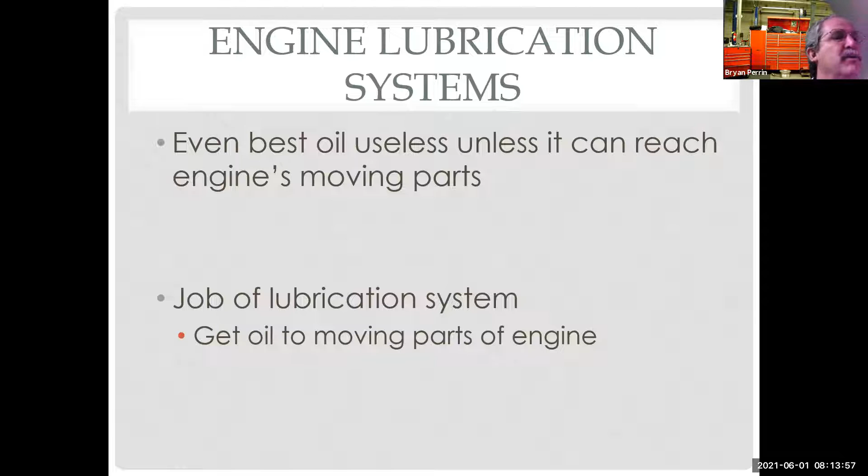Even the best oil is useless if it cannot reach the engine's moving parts. The job of the lubrication system is to get oil moving to the moving parts of the engine. On automotive engines today, we use a combination system of pressure lubrication and splash lubrication.

Pressure lubrication is where I have an oil pump. I'm going to pick the oil up and force it into certain places. We do that for our friction bearings, which is the primary place we force oil pressure into. That's what allows us to use an oil filter. I couldn't have an oil filter unless I had a pressure lubrication system.

Then we also have components of the system that are splash lubricated. The timing chain, a lot of my valve train, rocker arms, things like that, have oil just splashed on them, and that's enough lubrication for those things. So I don't have to pressure feed everything.

There are systems out there, like on air compressors and lawnmowers, that are splash lubricated and don't have a pressure lubrication system. They rely on the crankshaft actually going through the oil and throwing it up. A lot of times there's a little scooper that throws oil throughout the engine. And that's why lawnmowers don't last very long.

Lawnmower engines just don't hold up very long. And you're thinking to yourself, wait a minute, I've had a lawnmower for 10 or 15 years. Well, let's think about how many hours of runtime that is.

Because we know we don't mow the lawn every week. We don't need to mow it year round. And how long does it take you to mow the lawn? Is it a half hour? Maybe you have a big lawn, an hour, that would be huge. So odds are that mower fires up and runs for 20 to 30 minutes, maybe 30 times a year.

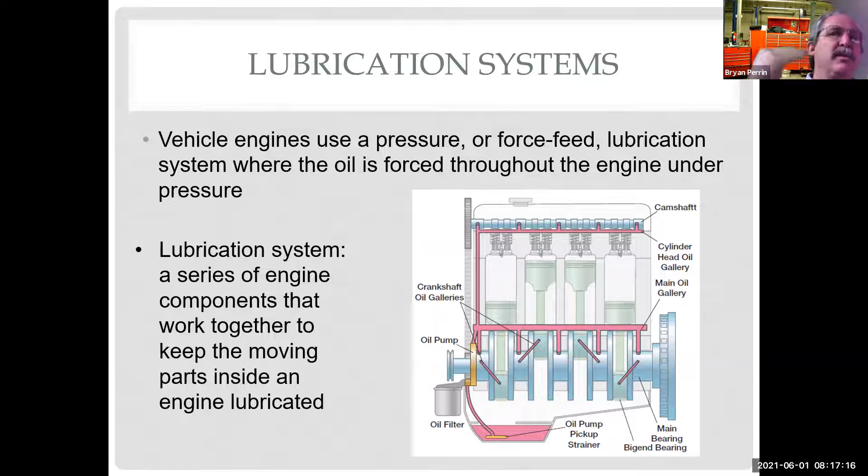On a friction bearing, oil is used between what two components in order to reduce friction? Number 3, between the bearing and the spinning shaft.

Because remember, the housing doesn't move. I don't need to lubricate between the housing and the bearing; the housing's holding the bearing. So the part that's rotating is the shaft, and that's where we need to put the oil, between the rotating shaft, whether it's a crankshaft or a camshaft, and the bearing.

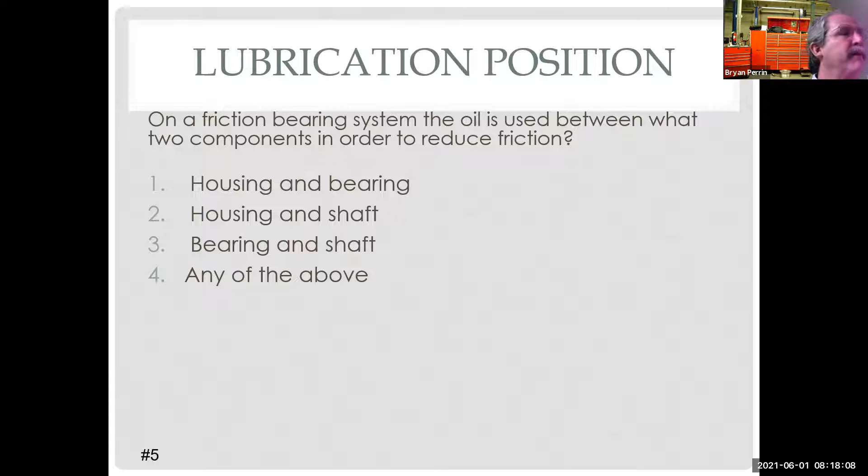We have two different types of oiling systems we use on automobiles: a wet sump system or a dry sump system. A wet sump system has oil in the oil pan, and we have a strainer in the oil pan where we use difference in pressure. We create a slight vacuum, pull oil up into the pump, and then circulate it through the filter and into the rest of the engine.

So most of the cars on the road, 99.5% of the cars on the road, or 99.8% of the cars on the road, use this system.

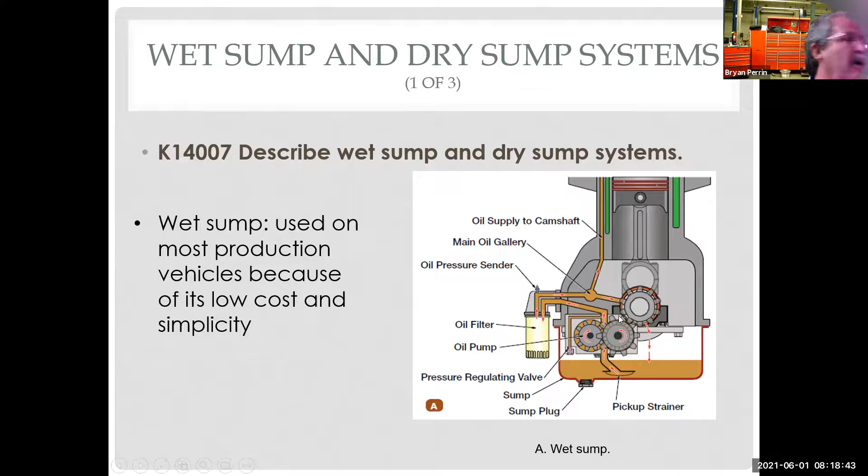There are a few cars that use what's called a dry sump system. A Porsche 911 was one of those. The advantage of this is that the crankshaft cannot hit the oil in the pan.

I can make the pan shorter, so this is great for clearance, as well as now I'm using a low pressure pump to pull stuff out, over to an oil hold tank, and then a high pressure pump to put oil back in the engine. This is a real advantage for racing, because if I'm cornering real hard, going uphill or downhill real hard, I have constant oil supplied to the engine.

To put in perspective, a Porsche 911 six-cylinder engine would hold 9 to 11 quarts of oil. That's a lot of oil for a small six-cylinder engine. One reason is because it had that oil tank. Another reason is it was air cooled, so it used the oil entirely for cooling on these older ones. But this is a dry sump system, so you'll hear wet sump and dry sump.

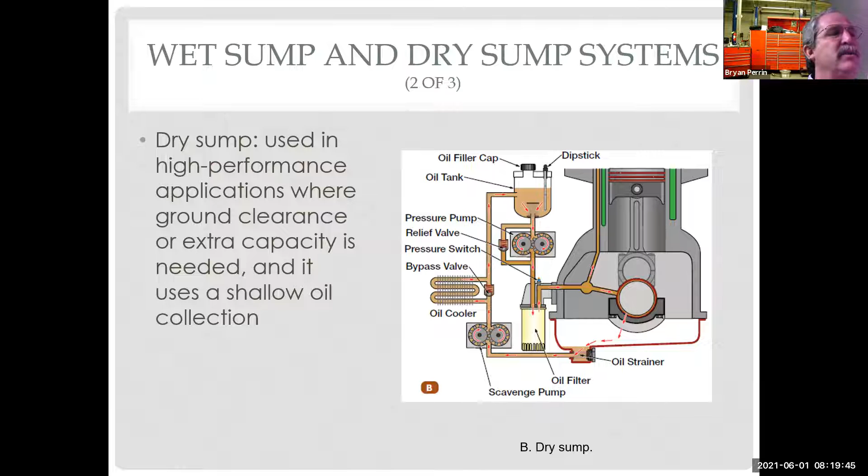The oil pans can be broken into a couple parts. So this right here, what we're actually looking at is a sub pan, because you see how shallow it is. I'm not holding 4 quarts of oil in that. So this will have an aluminum main oil pan and then a tin or aluminum sub oil pan, very common on cars today. And here's our drain plug, we always want to replace the seal on the drain plug anytime we pull it out.

This is a windage tray. Windage trays are used to keep oil away from the crankshaft as it's spinning. We saw those a lot on older vehicles, especially trucks going back to the 70s.

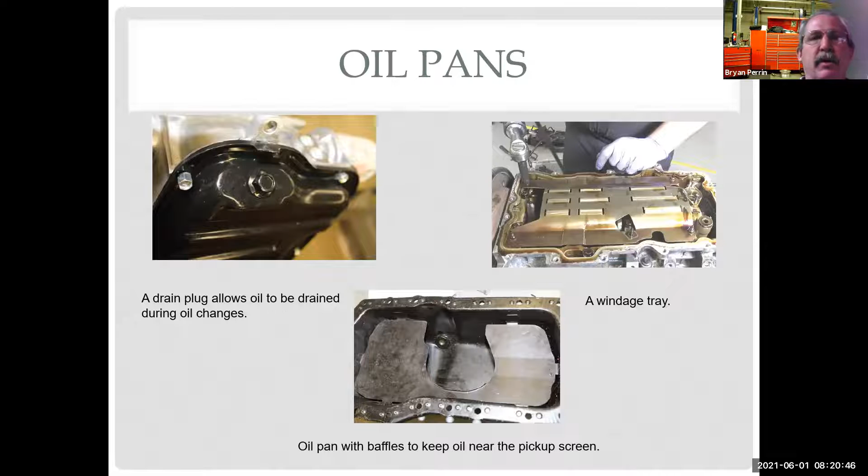A lot of cars today have baffles in the oil pan. One of the purposes of the baffles, which we'll see vertical as well as horizontal, is to control the movement of the oil in the pan as we accelerate, decelerate, go side to side, and corner, making sure we keep the oil down away from the crankshaft, but also so the pickup can pick it up.

And here's what I was talking about by splash lubrication. This is from something like a compressor. Here we can see I have a camshaft and a crankshaft, using gears to connect the two. I have a little slinger that's going to come through and grab oil and just toss oil around inside here. So we're just splashing oil in here.

You can see where using this system really limits how much power I can put into this combustion chamber and push down on the piston, because the more power I make here, the more force is applied on this surface here, the greater the effects of friction.

So I can use this on low power applications like an air compressor or like a lawnmower. And certainly old cars, if I go in the Wayback Machine, go back 100 years, you'll find that engines were splash lubricated. But engines didn't last very long either before they had to be taken apart and rebuilt.

That's why we use a pressure oiling system on all the parts that require oil to be forced into them, and then rely on splash lubrication for the areas that we can just allow oil to drain over to keep it lubricated.

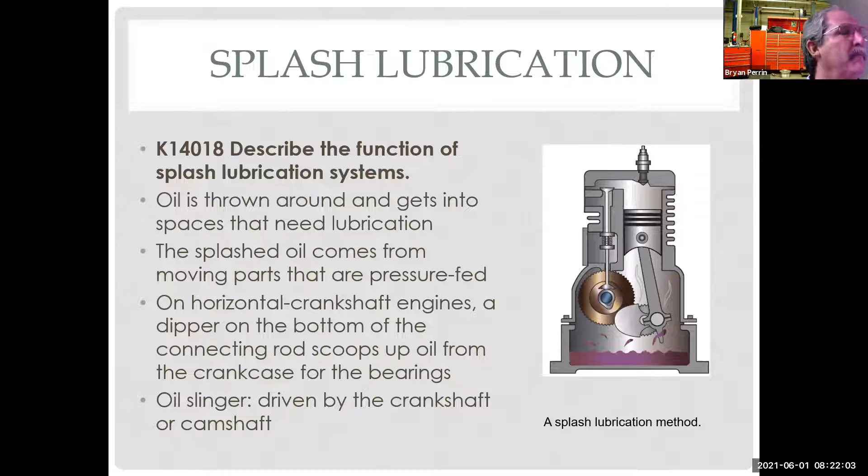So what type of oiling system is used on modern automobiles? A combination of pressure and splash lubrication. Absolutely.

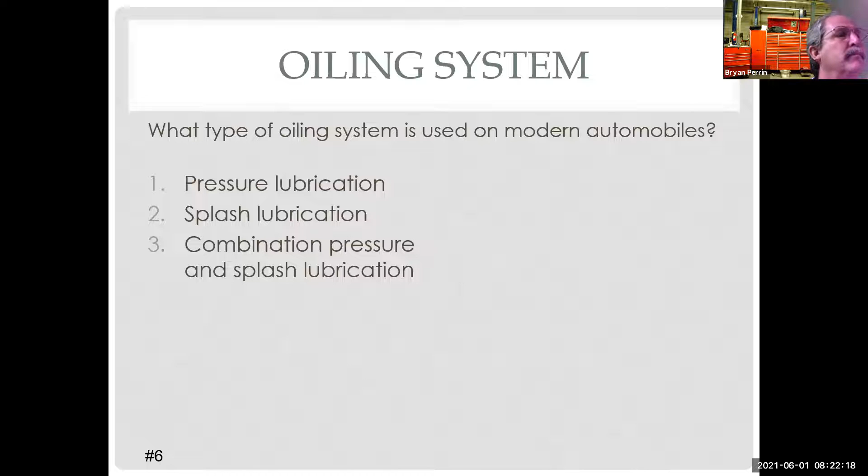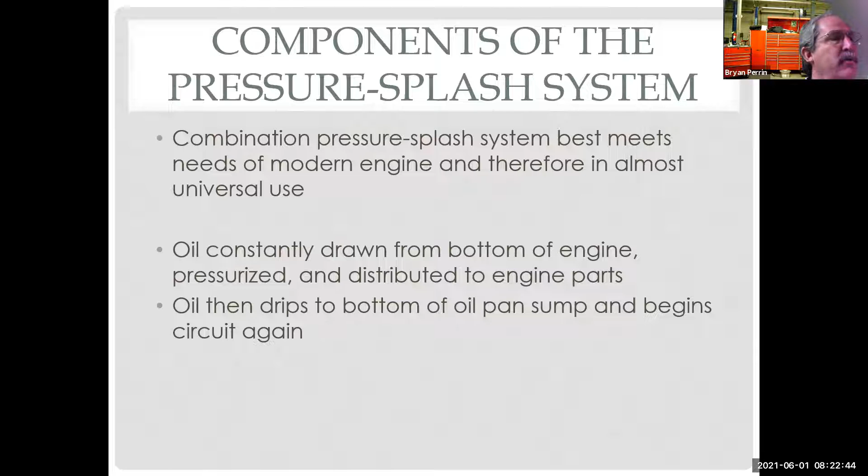The components of the pressure splash system, the combination pressure splash system, best meet the needs of modern engines, and therefore are in almost universal use. I can't think of anyone who doesn't do it. Oil is constantly drawn from the bottom of the engine, pressurized and distributed to engine parts. The oil then drips to the bottom of the oil pan sump and begins the circuit all over again.

So the first thing we have is what's called a pickup tube. The pickup tube will have a coarse screen on it, and this coarse screen will pick up large contaminants.

So it's really, although it's made out of a heavier metal, the screen's about the same size as the screen you see on your window. So anything that can get through your window screen is going to be pulled up into the oil pump. This is really designed to keep big particles out that would damage the pump, because we don't want to damage the pump internally.

The downside is that if I have foreign material in the oil pan, such as silicone from someone cleaning the valve cover gasket and scraping it, it can end up in the engine at the bottom. Or if we have a lot of buildup from burnt oil or bad oil, we get carbon chunks in the oil. Both of those can plug the pickup screen, and if this screen plugs up, we'll starve the engine for oil and very quickly damage it. That's why we really don't want things ending up in the oil pan. Even though debris can't get sucked into the oil pump if it's big, it can still block this screen.

When the screen gets blocked off, it's kind of like drinking a milkshake through a straw and you hit a piece of ice cream. You're no longer getting any milkshake, because the ice cream is blocking the bottom of the straw. Same thing happens here. So as we're pulling oil in, if this gets blocked, we lose that oil flow.

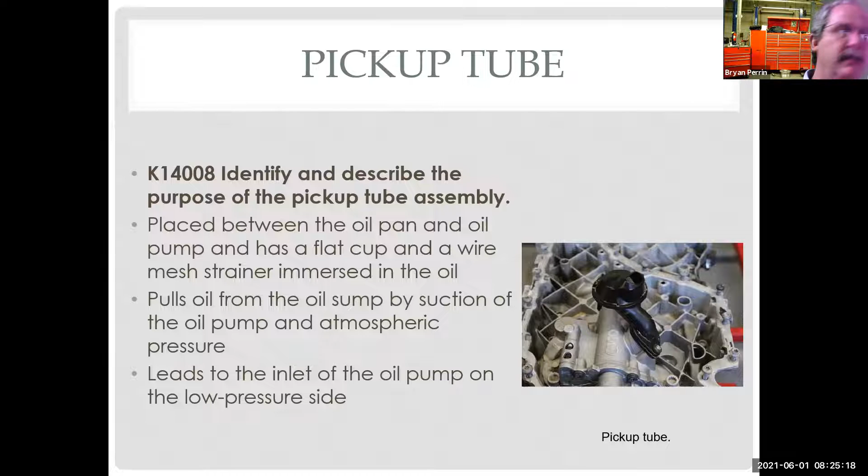We use a couple of different kinds of oil pumps on the engine that the book goes into. They all do the same thing: they pull oil from the oil pan and put it into the bearing journals and galleries of the engine, forcing oil under pressure through the lubrication system to deliver it to the parts that require lubrication. They're normally driven by the camshaft or crankshaft. Depending on the pump design and the vintage of the vehicle, they can be driven by the camshaft, the crankshaft, and some today have their own little timing chain, mounted as an oil pump cassette underneath the crankshaft, but it's still driven by the crankshaft, just connected by chain, not directly.

In a rotor type oil pump, the inner rotor drives the outer one, and oil is forced out of the pump outlet. Higher atmospheric pressure outside forces oil into the pump, filling the spaces between the rotor lobes.

One of the things the book does that I think is really confusing is they keep mentioning, and they do this with the fuel system too, that it's higher atmospheric pressure that allows the oil to be moved. Well, it's really the lack of atmospheric pressure, vacuum, that's causing it to move. They're both saying the same thing, but if I'm drinking a milkshake with a straw, I wouldn't say it's the atmospheric pressure pushing the milkshake up the straw rather than the vacuum I create by sucking. I mean, both are true, because atmospheric pressure pushes it up because I've created lower pressure in the straw.

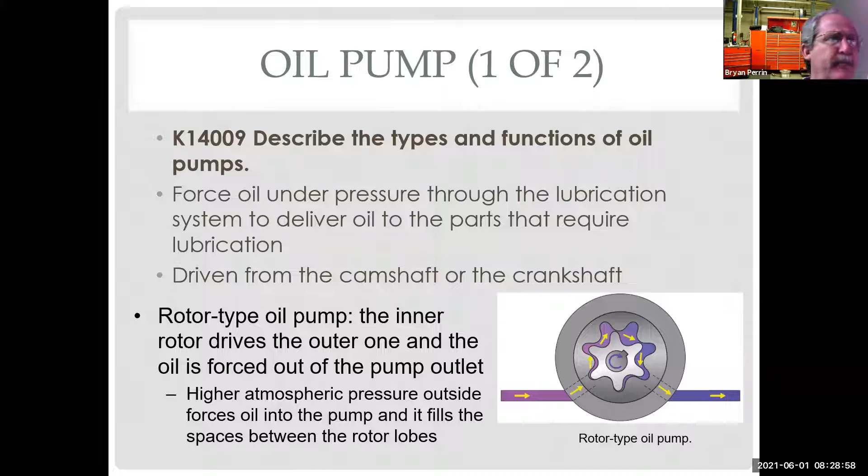I mean, it's all about pressure differential, but the book just describes it this way, and I think it's really confusing. It doesn't lend well to understanding or diagnostics, I don't think.

So a couple other types of pumps. I can have a geared oil pump. This first pump here is a very common pump today, the rotor type. This geared pump, we still use today, and these were used a lot back in older engines. And then the crescent pump, which we see on a lot of import vehicles. Toyota comes to mind, but a lot of import vehicles use a crescent pump.

The crescent pumps are mounted on the crankshaft. The center gear of the crescent pump is actually mounted onto the crankshaft, whereas these other two can be driven by a chain or a shaft, but they're not going to be mounted directly on the crankshaft. The crescent pumps are always mounted right on the front of the crankshaft. This is important because if I have an oil pump problem and need to work on it, where is it? Do I need to take the oil pan off because it's underneath, or take the front of the engine apart because it's a crescent style mounted as part of the front cover? That's where research is really important.

Oil pumps will last the life of the engine. They're normally replaced anytime the engine is rebuilt. Sometimes you only get one choice of oil pump — here's the oil pump for this engine. On many domestic products, especially V8 engines or older engines using a geared oil pump, I can buy a standard oil pump, or for a few dollars more, get a high pressure, high volume oil pump. When we rebuild engines, we always put in the high pressure, high volume one. It's literally $5 to $15 more, very little more. What it does is buy you a little bit more space if tolerances are out. Plus the customer's never going to have an oil supply issue on that engine, and it's going to get better cooling.

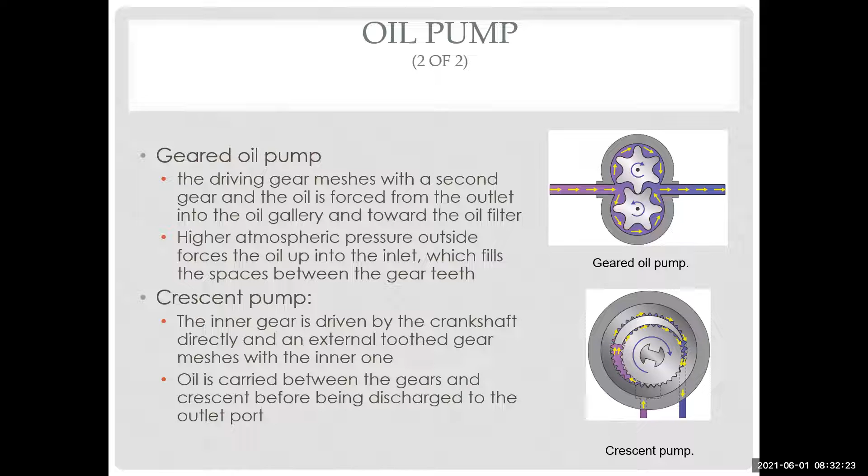A quick question on the high volume pump. So this comes from these forums that you love. A lot of comments I've read about high volume pumps complain that you get too much oil just hanging up in the top of the valve covers. Like it's so much volume, it's throwing it up there, and so you're losing it down low. I never buy into it, but I want to ask you about that. Is that a thing?

Absolutely not. You have huge holes for oil to drain back, and you have plenty of oil in the crankcase. You figure you got 5 quarts of oil in the crankcase, you're going to pump oil until you're down to about half a quart. So is it really a difference? I mean, say they're right, say I put more oil on top of the engine. Is it really a difference whether there's a quarter quart or a half quart of oil on the top of that engine?

No, none. I think there's still some in the pan, still. Yeah, you got plenty in the pan, you're under pressure. And if anything, now you're going to better splash lubricate. And everything is designed so where the valves sit and everything else, it pitches away from it and goes in the drain back hole. So you can't submerge anything.

And the amount of oil that's going to be static up there that doesn't drain doesn't change how much oil I put on there, because we're going to fill those little cavities, whether I put it up there a little at a time or a lot at a time. The difference is how fast is it draining back to the engine. So, if I put it up there, it's coming down. It's like...

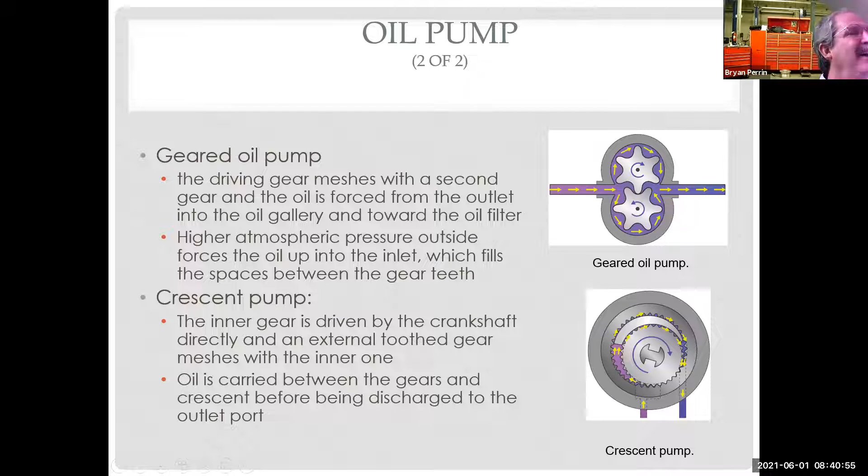So which oil pump design is mounted on the front of the crankshaft? Number 4. Number 4, the crescent.

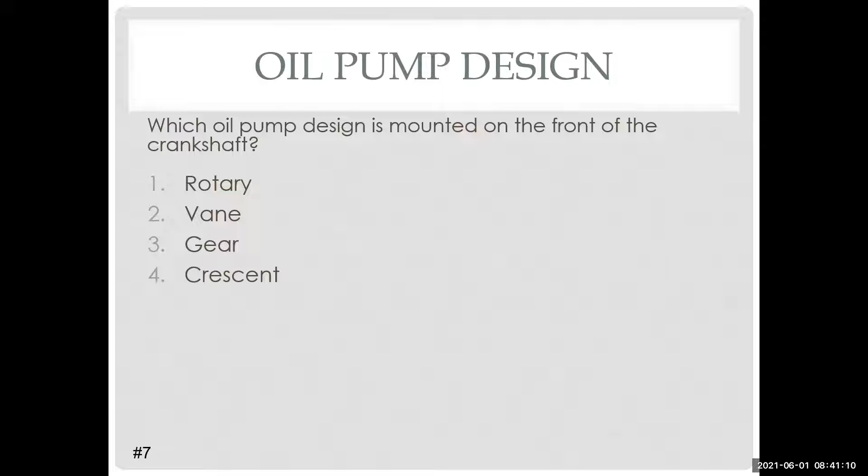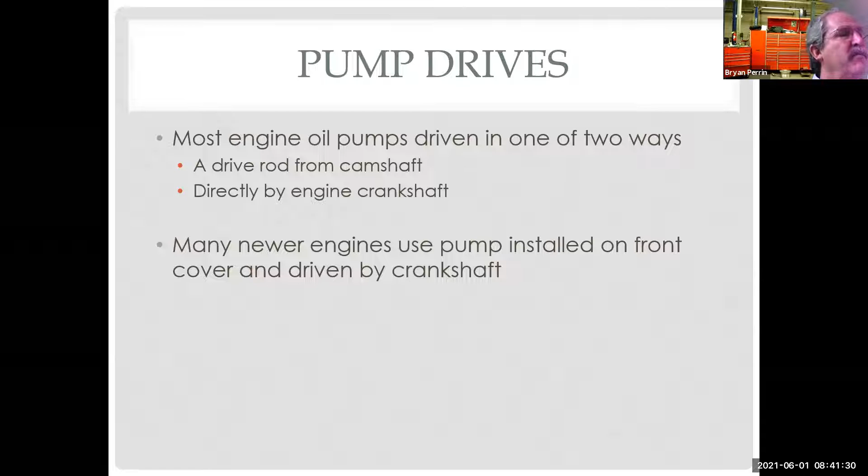Most engine oil pumps are driven in one of two ways: a drive rod from the camshaft, or directly by the engine crankshaft. Like I said, we are seeing a gain where they have their own timing chain, Mercedes did this, Volkswagen did this, and so on. Many newer engines use a pump installed in the front cover and driven by the crankshaft, like Honda, Toyota, and a lot of other ones.

So oil pressure relief, we were talking about this a little bit. So the oil pressure relief valve is a spring-loaded valve.

When I have enough pressure to overcome the spring pressure, we start bleeding off that extra oil back to the oil pan. So oil pressure is affected by the size of the leaks in the system. If I have a very tight tolerance, I've got a lot of resistance. As the engine wears and the tolerance gets bigger, it takes more oil to fill that and keep pressure.

So we're following it so far. I haven't even brought the pressure relief valve in yet. We're just filling up that area because the pressure relief valve doesn't come into effect until I hit that maximum system pressure. Now, is that maximum system pressure 80 PSI, 90 PSI, 60 PSI, whatever it's set at? So if I have a low volume pump, I'm never going to hit the maximum oil pressure in the system.

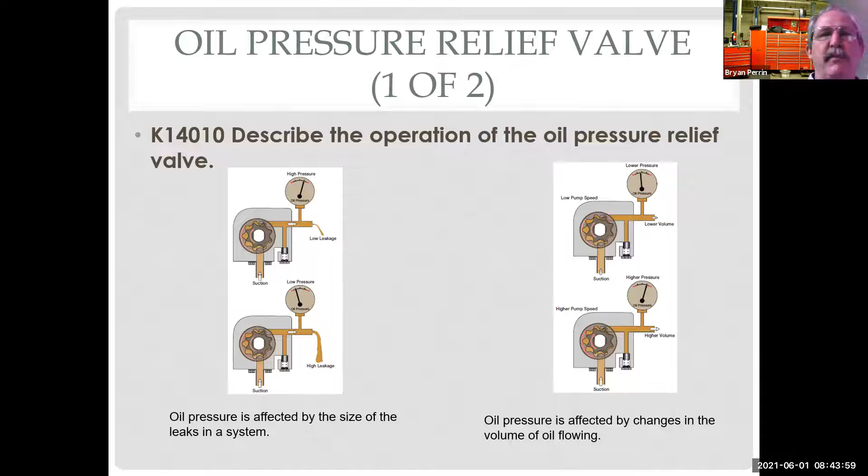And so on these systems, think about it - I need a certain amount of pressure to let that out. If I'm not making enough pressure, we're never going to open up that relief valve. So here, if we look at the relief valve, as my pressure gets up to a certain point, then we overcome the spring and we allow the oil pressure to be released back. And so these relief valves, a lot of them are made into part of the pump. Some of them are on oil filter housings.

So we do see some other locations for this - front timing covers. And this is a spring and it's shimmed. I mean, I've worked with people that will go through and actually add shims in here to increase the tension on the spring, so it's harder. So it increases the amount of oil pressure that the system can handle.

And that's how I know that once you get over 100 PSI, you start blowing oil filters apart. Because I've seen oil filters blow apart from people playing with this, right? You know, if a little is good, a lot's got to be better. Well, there's a point where it's not better.

So having the higher pressure volume pump is great, but you still want to have that pressure relief valve set at a reasonable level. And so if I'm buying a pump with a pressure relief valve built in, I'm going with the engineers that sold this pump to me - they've already done the research and know what the filter and everything else is going to handle. Because you think about the liability: if I put their pump on and it blows my filter off and I blow up my engine, they're getting sued. So they're not going to do anything crazy with it - they're going to go far enough that they've tested, so I'm not going to have a problem with it. I'm kind of a big believer that I don't need to reinvent the wheel.

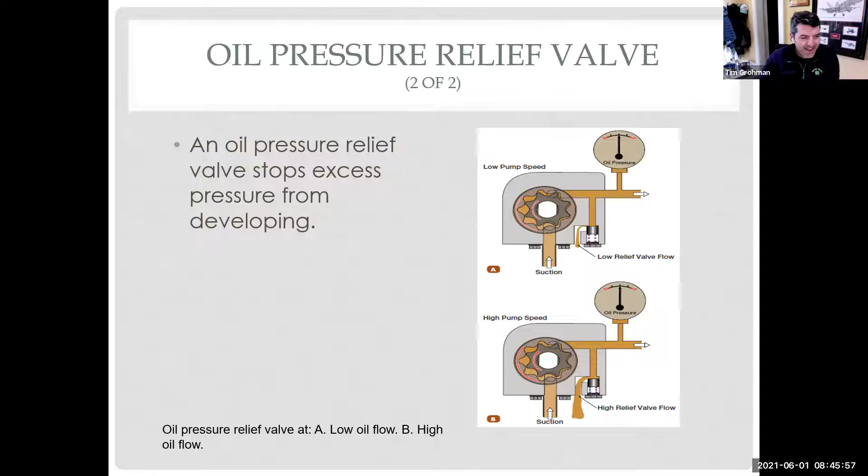So there are two different types of oil filters we use: a full flow filter and a bypass filter. They use pleated paper for the filtering medium, and all filters have a bypass valve in them. One issue we see is people say, I went all this time and my stuff's fine. Well, how do you know your filter didn't plug up 5,000 miles ago? Now you've been running the last 5,000 miles without a filter because you're just bypassing it.

So filters are not all the same. They vary by the amount of capacity and how they flow through the filter. Most filters go down to about 20 micron, and on the Napa site, you can see the specs on what your filter goes to.

The other big thing is surface area. Here we have a pleated filter, and this paper zigs and zags, creating surface area for the oil to go through. If I have more pleats, that's more surface area. I can also circularly wind the filter for deeper filtration, using less surface area but more filtration.

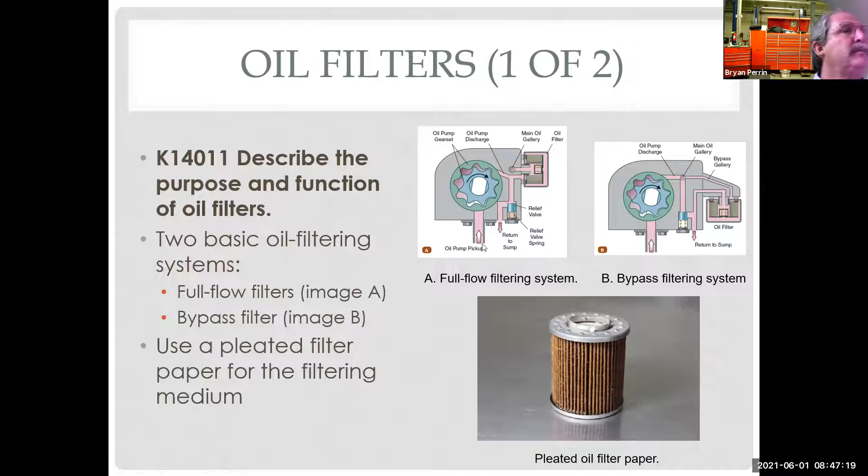The other big distinction between filters is whether I'm using a spin-on filter or a cartridge filter. Spin-on filters became very popular in the 1960s and have kept that popularity, and a lot of manufacturers still use them. Cartridge filters are what we used prior to that, in the 1950s. Some European vehicles continued using cartridge filters up into the 80s. Then in the 90s, all of a sudden the Europeans went back to cartridge filters, because in Europe they're really concerned about all this metal going into the waste system.

So they only want paper filters, and by paper I'm using the term generically. They're made out of other things besides paper - for example, Mercedes uses a fleece filter on some of their cars, because that's the only way they get the service interval, since the paper would break down before the oil does. So I'm using the term paper generically. But the European market said no more spin-on filters in Europe, so that's why European cars got this. Even my Toyota uses a cartridge style filter. That hasn't really taken full hold here yet, but a lot of manufacturers that are either based in Europe or sell a lot there have gone to the cartridge style filter because of European regulations.

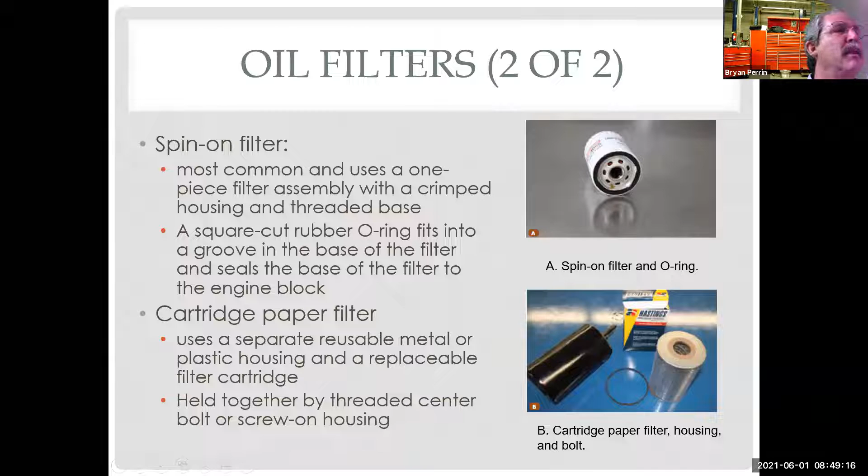So for filter operation, here is a regular spin-on filter. The oil comes in through the outside, through the pleated paper, and out the inside into my oiling system. That's why when you're taking off the plastic that goes around the filter, you never want to put your finger in the middle to pop the plastic in, because occasionally a piece of plastic will end up getting forced into the oiling system. I've seen it destroy the top of an engine because it plugs up the oil port. I got some cool pictures of a camshaft in 2 pieces on a Honda with 5,000 miles because the service tech at the dealer did that.

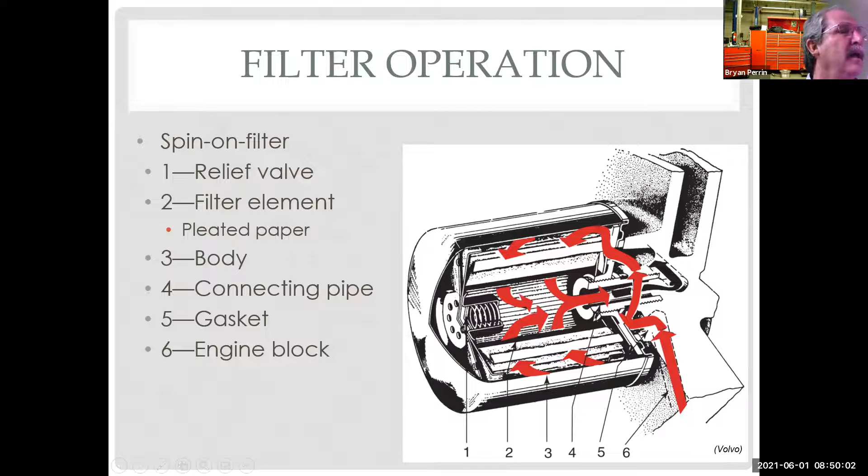And here is a deep depth type filtration. Instead of pleating, there's a lot more media to go through, and this media has an infinite number of paths through it, then it comes out here. Both of these have a relief valve in them. The relief valve is there because my pump is making pressure - if I have too much restriction in the filter, we're going to push through this relief valve and we are no longer going to be filtering our oil.

Some filters also have a valve - this might go back to the earlier question because I didn't ask what kind of car had the oil light flickering. Some filters have a drain back valve in them. Honda is one. Some cheap filters don't have that drain back valve, so it'll drain the oil out of the galleries, off the camshaft. So the oil light will flicker or stay on for 3 to 5 seconds when you start the car. Use a good quality filter made to OE specs that has the drain back valve in it.

We'll keep that from happening. Now, not all cars use a drain back valve. And I didn't ask what kind of car you were getting the oil flickering light on. I really didn't think about it till we got to here. But that is something also.

I've seen that on Honda, I've seen it on Subaru, where the filters don't meet the OE specs. They don't have the drain back valve. They're a cheaper filter. And the car doesn't have oil pressure for that first 2-3 seconds to start up as it's filling everything back up. Where with that drain back valve, it keeps everything from draining out of the oil system. Now you're getting that pressure within a second.

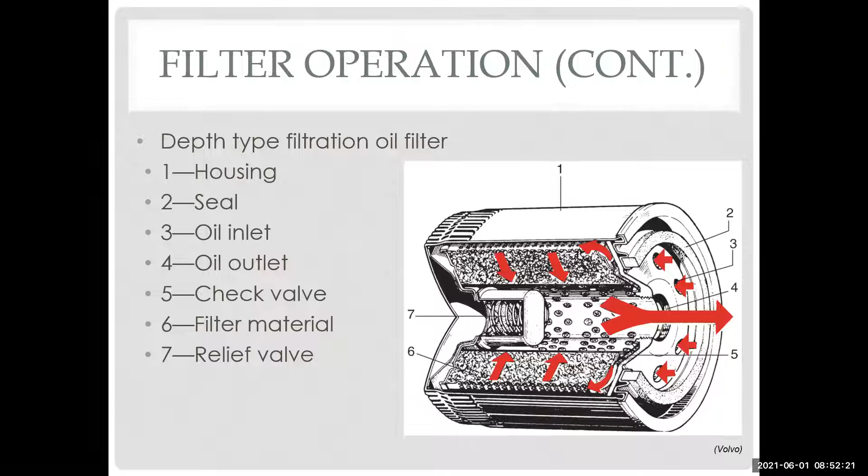I thought I was using a good filter, but the Amazon match doesn't show that it matches. So maybe that's why. Maybe. So what you might want to do just for fun, spend a couple bucks, get a factory Honda filter for it and see if the problem goes away. Okay, good point. Thank you. You bet. Sorry, I didn't think of it sooner, but it's kind of Monday except for it's Tuesday.

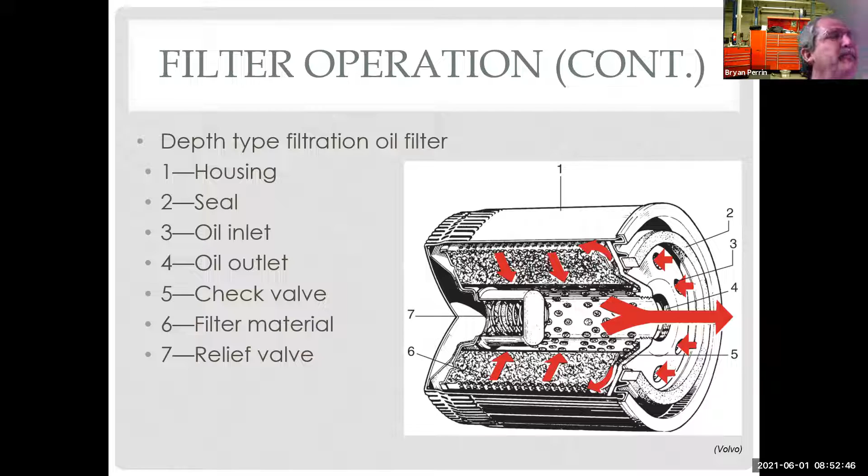So oil galleries and lines: the main oil gallery runs the length of the block and connects to most other galleries. A gallery is a passage inside the block that oil is allowed to go down through. I don't know why we use a fancy name for it. It's just an oil passage.

There are passages drilled from the main gallery over to feed the main bearings, up to feeding the camshaft and the cylinder head. So we have 2 passages in the block. One is called the galleries, which are the ones that are under pressure. And then we have the oil return, which is just open area that oil is going to fall through and come back. Those are normally not machined, they're part of the casting.

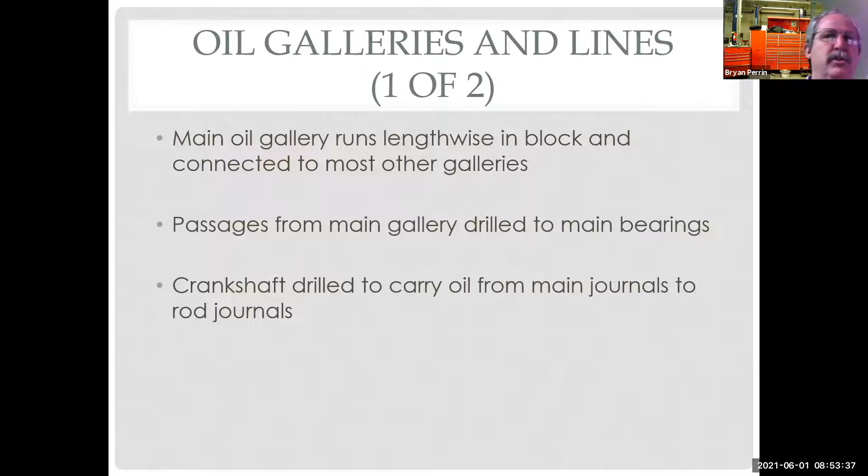Crankshaft journals are drilled to carry oil from the main journal to the rod journal. So there's actually hollow passages inside the crankshaft.

Some engines use separate oil lines to carry part of the oil flow. For example, a Toyota 3.5 liter engine had oil lines on the outside of the cylinder heads, moving oil from the block to the cylinder head. So we've seen that over the years. I know that... no, I'm sorry, that was BMW did that, because I replaced a lot of those oil lines. So we do see that.

Some are solid steel lines, some are flexible line, high pressure hose. Some rods are drilled through the full length to carry oil to the wrist pin. Again, it's an engineering choice: do I want to splash lubricate the wrist pins or pressure lubricate the wrist pins? Well, if I want to pressure lubricate them, now I need to have a hole drilled all the way up the connecting rod, connecting oil pressure from the connecting rod journal all the way up to the wrist pin.

So again, how long do I want the engine to last? How much horsepower am I getting out of it? What do I think I need to do? Everything is based on cost and longevity. If it makes it 500,000 miles without it, why would I do it? On the other hand, if it breaks at 50,000 miles without it, and then I put it in and it makes it 500,000 miles, now I need to do that as part of my build. So it does vary by manufacturer and engine design.

Others have tiny holes that line up with the crank journal once every revolution. These are a spit hole that will actually spray oil onto the side of the cylinder wall or up onto the piston for cooling.

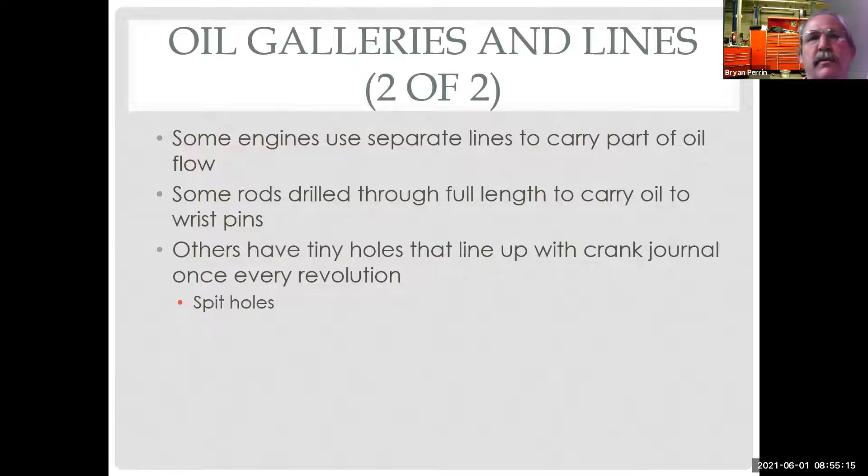So the more oil I flow at better pressure, the more oil I can send to all these places and get good oil returned back to the pan. And as I return it back to the pan, I'm getting rid of the heat generated in all these places.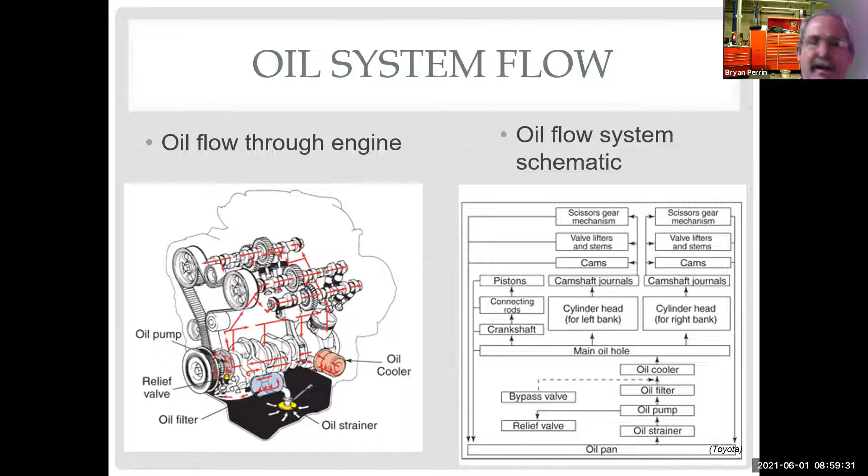So here's just another diagram showing oil flow. Again, oil pan, pickup, oil pump, oil filter, main galley, which feeds our crankshaft. These little lines go from our crankshaft to our connecting rods. And then I'm going to feed oil up to my camshafts, and I'm going to have some oil I'm going to spray back onto the timing chain. That's an oil spray nozzle they're showing there.

A lot of times timing chains are only lubricated by the oil that's forced out of the camshaft up top, and then it drains back the front of the engine. So again, back to the discussion, high pressure, high volume, I'm putting more oil on my timing chain because I have more oil returning.

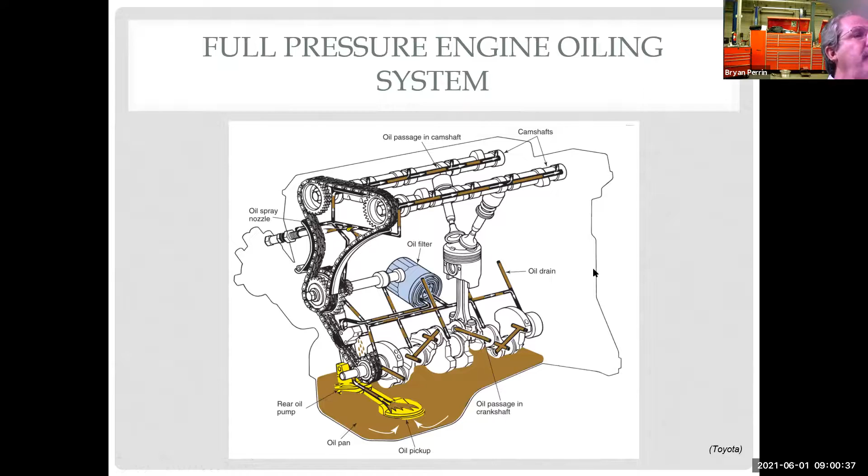The bearing receives oil from a hole drilled through the bearing support. The insert has a hole that aligns with the one in the bearing support, and oil passes through it and engages the journal, pulling oil around the journal. Oil is constantly forced through the bearings.

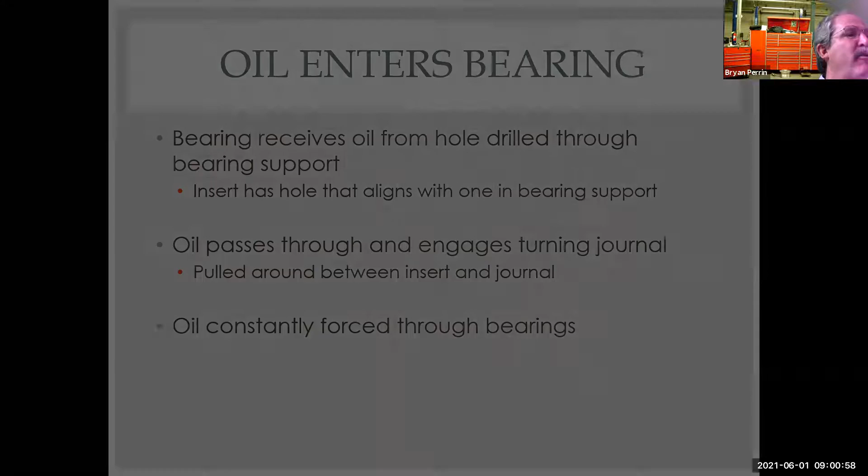So here's what I'm talking about. Here's our oil hole. The bearing's going to set in here and have a hole, which it does. Here's the bearing, here's the journal. So this oil is going to be allowed to spin around the inside here. And since it's under pressure, it's going to be pushed out both sides.

There's no seals on the side here, and here's an oil squirt hole they were talking about. But there's no seals on the side. So this is a very tight tolerance bearing with oil squirted in the middle of it under pressure. Since it's squirted in the middle and it's rotating, it's going to be forced out both sides and spun all the way around.

So that oil is constantly coming out both sides. I have to put enough volume in to create back pressure, because the oiling system has leaks. It's not sealed. We're flowing oil out past all these bearings. So I need enough volume to create that pressure, because that pressure is generated by back pressure. If I have low volume, I'm going to have low pressure because I'm not generating sufficient back pressure to the size of the leaks I have.

That's also why as engines wear, oil pressure will drop. Because if I originally had one-thousandth of an inch clearance between the bearing and the rod journal, and now I have 1.5 thousandths or 2 thousandths clearance, exponentially that's huge, because it's not a one-to-one. Which means I'm going to lose more oil out the sides, and it takes more oil to fill that gap.

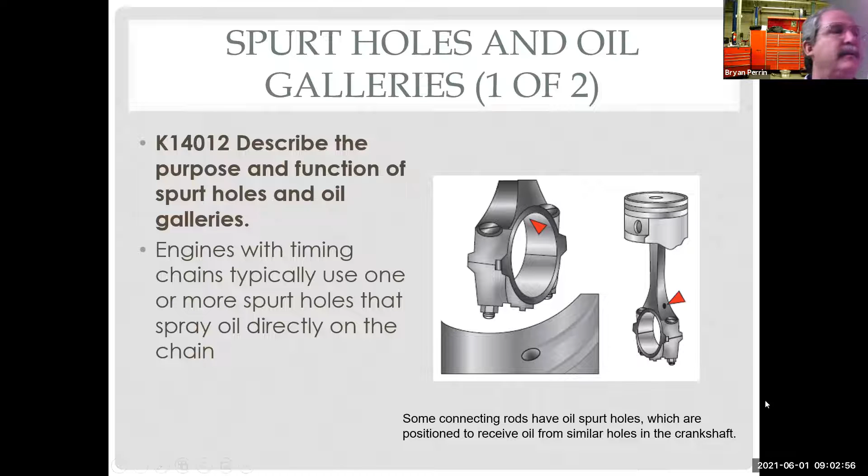Spurt holes and oil galleries: heavy duty engines have an oil nozzle that sprays into the bottom side of the piston. We normally only see that on bigger diesels. I'm not aware of any passenger vehicle that does that.

Oil is fed to the cylinder head through oil galleys onto the camshaft bearing and valve train. Oil drains back to the oil sump through oil drain-back holes located in the cylinder head, engine block, and the big area where the timing chain is. If there's a timing chain, it's going to come right down through the front.

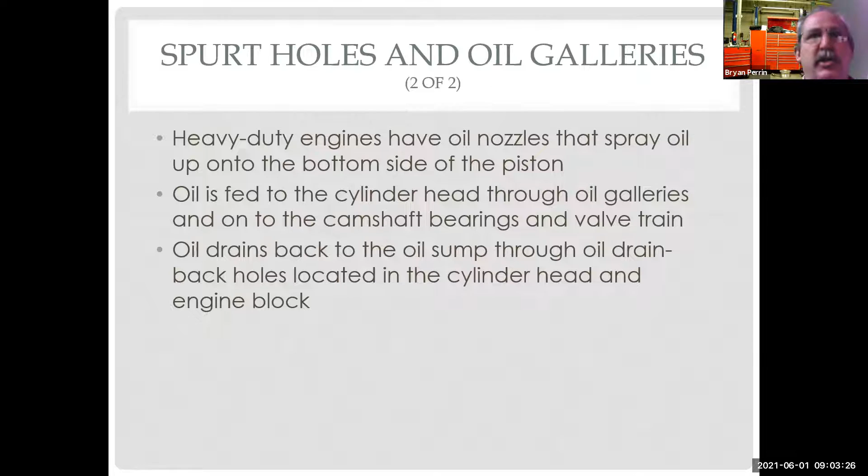Oil is retained in the engine using gaskets, sealants—which is kind of a liquid gasket—and seals. Although the terms get really convoluted by manufacturers, as a rule we're going to use a gasket, and keep in mind a sealant is a type of gasket between two pieces that don't move. I'm going to use a seal between something that doesn't move and something that does, like a rotating shaft.

So I'm not going to use a gasket to seal the crankshaft, but I'd use a gasket to seal the oil pan because the oil pan and the block don't move. So I would seal them together and use a gasket. But since the crankshaft is rotating, I need to have a seal there where one part is not moving, the block, and the other part is the shaft.

So oil seals are used at the front and rear of the crankshaft. We use them for the camshaft. Anytime we have a rotating shaft, we're going to use a seal. If it's two things that aren't moving, we're going to use a gasket. And RTV, which stands for room temperature vulcanizing silicone, is what we'll use.

We also use an anaerobic sealant on some specific applications. If you need to use an anaerobic sealant, the manual will call for that specifically. We see that on some European engine assembly, and some other real limited stuff. And the manual won't just tell you they want an anaerobic sealant—they'll give you the Loctite part number or the Permatex part number they want you to use.

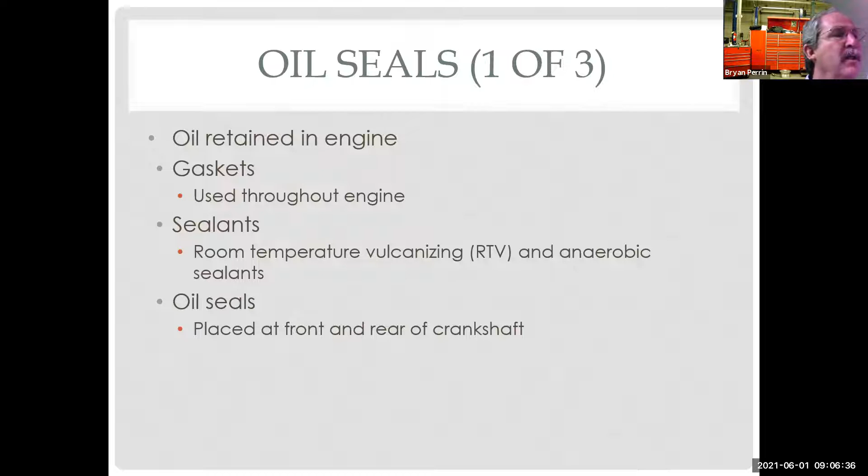So here's an oil pan gasket. I could also make an oil pan gasket using RTV. Many manufacturers no longer use regular gaskets - they use RTV from the factory. You can buy a lot of different kinds of RTV. Any kind you buy, you need to make sure that it's oxygen sensor safe.

Because they do sell silicones at the auto parts store, the cheap ones that are not oxygen sensor safe, and they'll actually ruin your oxygen sensors. They'll poison them. So great, you save $2 on that tube of silicone, and you just eliminated 4 oxygen sensors at $100 each. But good job.

So you do want to make sure you use the right type. In the shop, we don't even have any of the non-oxygen sensor safe silicone, even though I could use it for a differential or for a thermostat housing or coolant stuff that's not going into the engine oil system. But why? So we generally use the oxygen sensor safe silicone on everything.

A lot of times we use the ultra gray or the ultra black, the two common ones we see used in the shop because they duplicate the OE colors. There's a European company, Dirko, that we use on a lot of the European stuff.

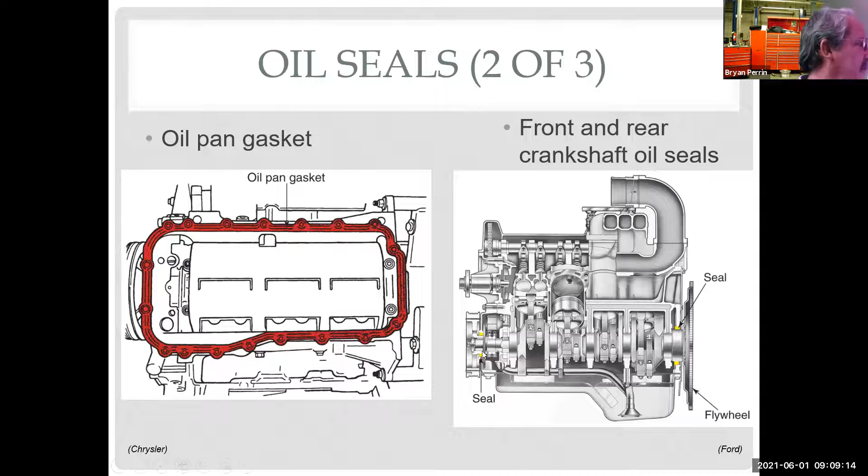And here we see our front and rear oil seals. Some manufacturers will use a slinger, and what the slinger does is direct a lot of the oil away from the seal, so the seal will last longer - it's not trying to hold back as much oil. One manufacturer, MG, back into the 70s or even early 80s, didn't even use a rear main seal - all they used was a slinger to bring the oil back. And that's why those cars always dripped, because there was no rear seal.

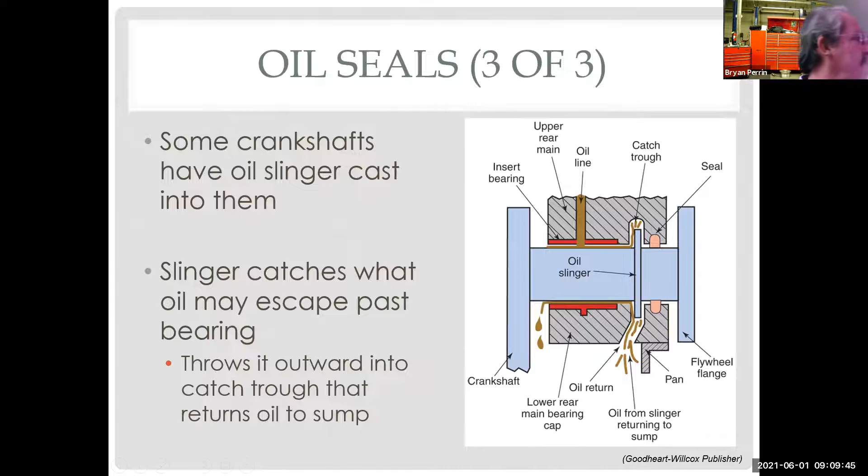Oil pressure indicators - we do care about what the oil pressure and level is. So I can have an instrument panel mounted gauge or light. The light's going to be a switch, the gauge is going to be a sensor, right? Because the gauge has to use variable resistance, where the switch is an open-close switch, lights on or lights off. The electric oil pressure gauge uses a different sensor unit than the electric water temperature gauge, obviously, but the same principle applies to the electrical circuit.

So for a cooling system, we're going to use basically a thermistor to change resistance with temperature. Here we're using something more like a map sensor that changes return voltage or changes resistance with pressure. Some vehicles use a warning light to indicate when pressure drops below a certain point. To put that in perspective, most systems require 13 to 30 psi oil pressure somewhere in their spec. The oil pressure light usually comes on around 0.5 to 1 psi. So by the time the light comes on, you have a problem.

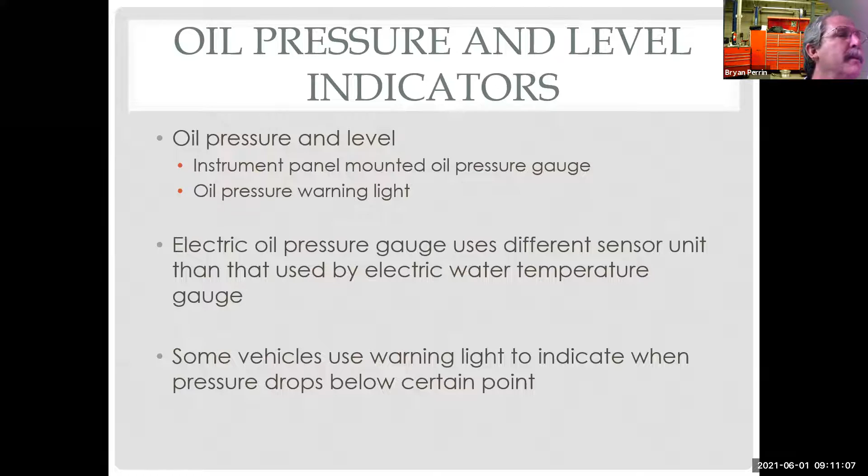Use the term warning light very loosely. Some cars have a gauge and a light, which is a good idea, or some other warning light, like check oil pressure.

So this vehicle has a gauge, but it has a light that comes on that says, hey, dummy, look at your gauge. That's helpful. The other helpful thing about this is now I can have you look at the gauge at 20 psi or 10 psi or whatever we program it to.

Here's our regular oil light, and here's a gauge. If you're reading 0 on the oil gauge, my first question is always, what do the other gauges read? If they all read 0, I'm guessing it's an instrument cluster problem or a fuse problem and not an oil pressure problem. Following the logic there?

So here are our two circuits. Here's our oil pressure switch. We have our light. Our light is powered. The switch has one wire to it and it controls the ground. Depending on the position of the switch contacts, we're either going to make contact or not make contact based on the oil pressure going into the switch. So we have oil coming out, it's going to push it, and when it does, it takes the light from being on, it releases the contact, and now we're no longer making contact and the light's off.

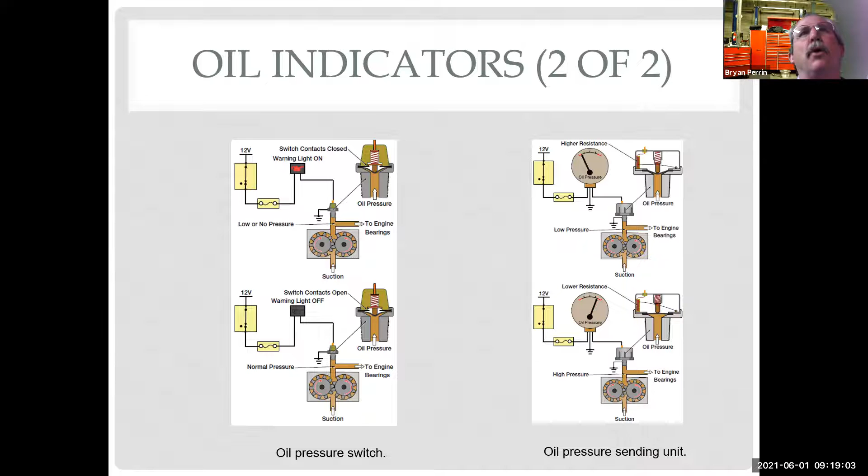That is so true. Can I ask you another question? You mentioned something about if the light or the pressure gauge is low, you ask the customer, what about the other gauges, right? So you mentioned it could be the instrument cluster. So I'm not connecting those dots with our electrical and everything, where is all that? Okay, so if my oil pressure gauge, I set it back on this picture here.

So my oil pressure gauge in this case reads 0. What does my temperature gauge read? What does my gas gauge read? If everything reads 0 or low, that sounds to me more like a power problem going to the cluster or back of the cluster, because odds are we didn't run out of gas on a cold engine with no oil pressure at the same time. So if everything is reading low or everything is reading high, I think it's a reasonable question to ask: is the problem really the one system I'm concentrating on, or is it something all these systems share, like a gauge fuse, in the case of GM which is what we're looking at, or a bad instrument cluster.

I mean, we need to at least ask that question. That's why, even though the customer might be complaining about one thing, I've had this a lot of times - they don't put the correlation together. Well, the gas gauge doesn't work and this doesn't work, but all they're focused on is they don't have oil pressure. Because I don't necessarily get a warning light for the engine being cold. I may get a warning light that I'm almost out of gas, and the customer just writes it off as, well, my gas gauge doesn't work right. A lot of people have had that. So sometimes people don't always put the dots together.

And that's why, if all the other gauges are working normal and the oil pressure gauge is reading 0, I have an oil pressure gauge problem. Whether that's a sending unit, a gauge, wiring, whatever, I don't know till I test it. But if all my gauges are reading 0, it's probably not an oil pressure gauge problem. It's probably a problem that affects all the gauges. Does that help? Yes, it does.

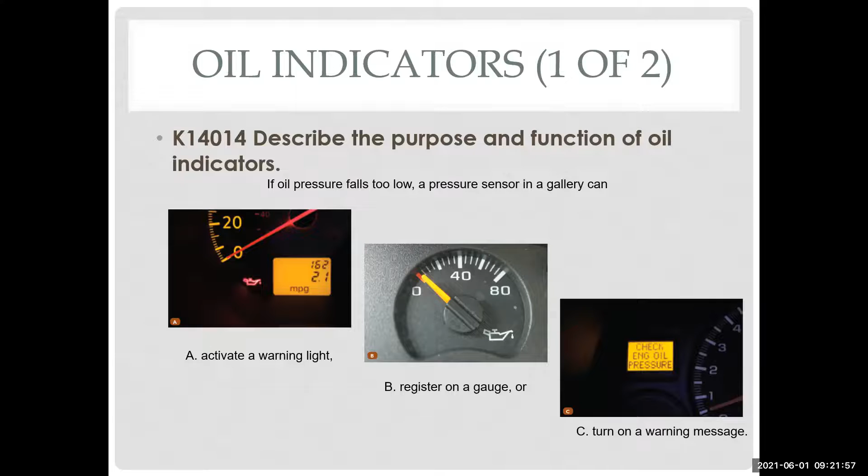So, cooling the oil - we're going to get into our next chapter. We do 2 things: we lubricate and we cool with oil. So there's a couple different ways we cool the engine. We define it into liquid cooling or air cooling, as we'll see shortly. Both systems use oil also to cool.

So the oil - you think about it, heat's generated by friction. I need to move that heat that's generated and dissipate it. So I'm going to dissipate some of that through my oil pan. I'm going to dissipate some of it in the other metal of the engine as I circulate it, drain it back down where it's not under pressure. So that's why my timing cover is made of aluminum, my block's cast iron or aluminum. I've got a lot of area that I'm going to heat and going to dissipate. And sometimes that may not be enough.

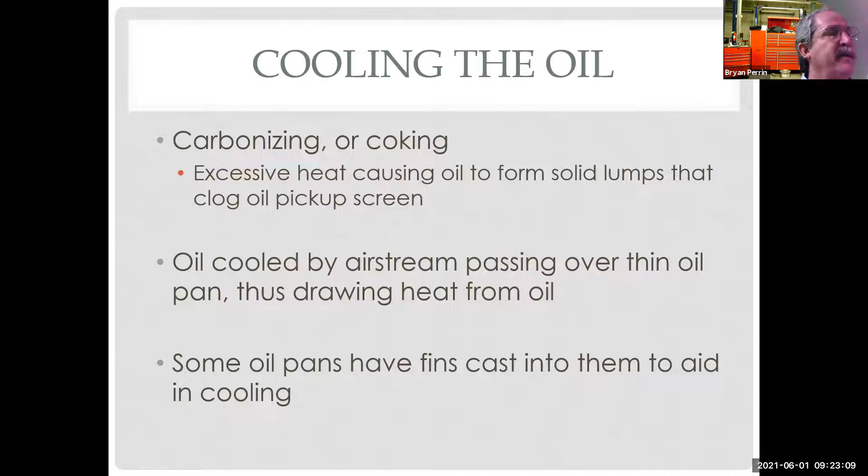So it may not move in enough. So some oil pans have fins. And so what we've done is we've added oil coolers.

There's 2 different kinds of oil coolers we see. One is mounted directly underneath the oil filter - very, very common today and very popular today. One of the reasons is that I can manufacture this engine assembly and drop it in the car. I don't need to hook up external things, because the oil cooler being right below the oil filter, the oil's flowing through it. We just put a couple little hoses that connect right back to the cooling system of the engine, right on the engine. So when we put that engine assembly in, it's complete. This is a European way of doing it. We first started really seeing this in the 90s. This is by far the most popular way to do an oil cooler today. Honda does it, Europeans do it, a lot of manufacturers do it this way.

The old school way of doing an oil cooler was we would put a cooler, kind of look like an AC condenser, in front of the radiator, and have hoses that went from the oil system under pressure all the way up to the front of the engine, through that cooler and back. GM did this for years on their trucks, where they actually had an oil cooler built into the radiator along with the transmission cooler. Some of them have external oil coolers. So again, this requires being tied in where I have a port where I can pull oil pressure off and feed it back in.

So a lot of these systems have a spacer plate that goes between the oil filter and the engine block, and it has a pressure and a return. So we're just going through the filter, then pushing it out here, bringing it back here, then it goes to the rest of the engine.

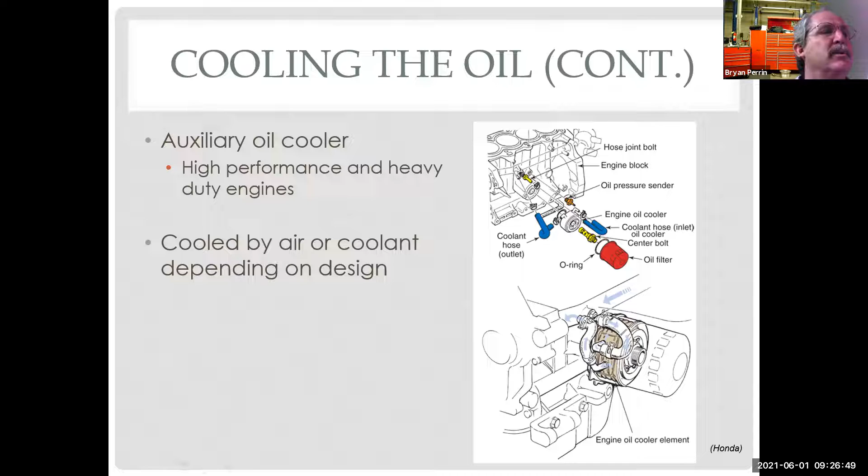I've seen a lot of oil coolers go bad. Very, very common, much more common than blown head gaskets are today. So I wanted to let you know about that. Like I said, not all cars have these, not all cars have oil coolers, but this is something that is still often misdiagnosed. And since we're getting into cooling systems next, I wanted to touch base on that.

So if you had that situation where the two fluids mixed, for either head gasket or the oil cooler problem, how much cleanup is necessary? You're the repair person and you want to isolate that. So how much effort will you invest into cleaning that area where they mixed?

So we actually had to put all new hoses on them, and we ran the engines, and we went through about a half gallon of simple green, putting simple green in the engine with water, run it, dump it out, more simple green, more water, run it, dump it out. That's probably the worst contamination I've ever seen.

And that was in the cooling system, because it was an oil pressure port that was pushing oil into the cooling system. So if you have oil in the cooling system, it's very different than if it's coolant in the oil system. Coolant in the oil system, you'll see that really white milk chocolate color when you pull the dipstick.

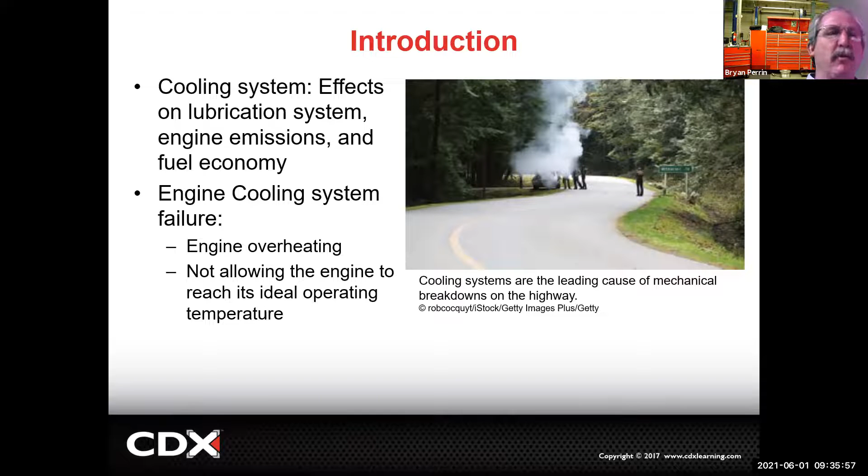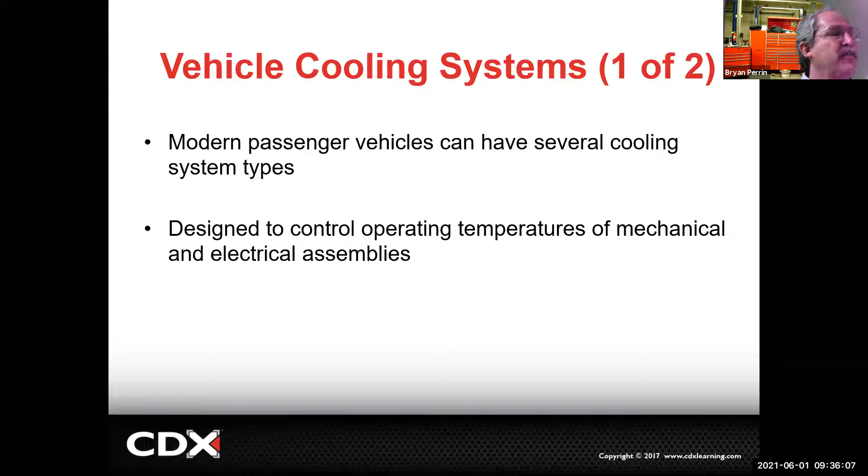Modern passenger vehicles can have several cooling system types designed to control operating temperature of mechanical and electrical assemblies. So I can have a cooling system for the internal combustion engine, which is what we think of as cooling. And certainly if I have an ICE engine, I'm going to have that on anything built since 1991 and sold in the US.

Supercharger can have its own cooling system. Turbocharger could. High voltage battery, hybrid motor generator assembly could have a cooling system. And these may be shared with other things, or they may be completely independent.

So we do have all these. For example, the Tesla has, we call it a cooling system, but it's really a climate control system because it's able to both cool the batteries and heat the batteries. So we're now seeing with it, when it comes to battery technology, it's not just about cooling the batteries, which is where we started. We put a fan and pull air past to cool batteries off. It's now really about temperature management.

And the same thing is true for my internal combustion engine, my supercharger, my motor drive. Things don't work well when they're too cold, and we don't want them to get too hot. So since they don't work well when they're too cold, they're not going to be efficient users of energy. And if they're not efficient, that means emissions go up. So we want to get to normal operating temperature extremely quickly, and then stay there. So we want to be very, very stable.

So without properly operating cooling systems, engines self-destruct in minutes. An engine will not last very long without a functioning cooling system. And minutes is not an exaggeration.

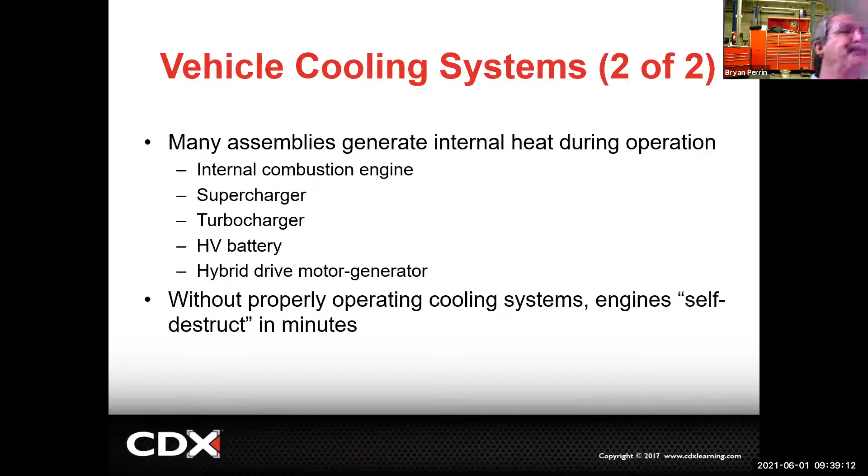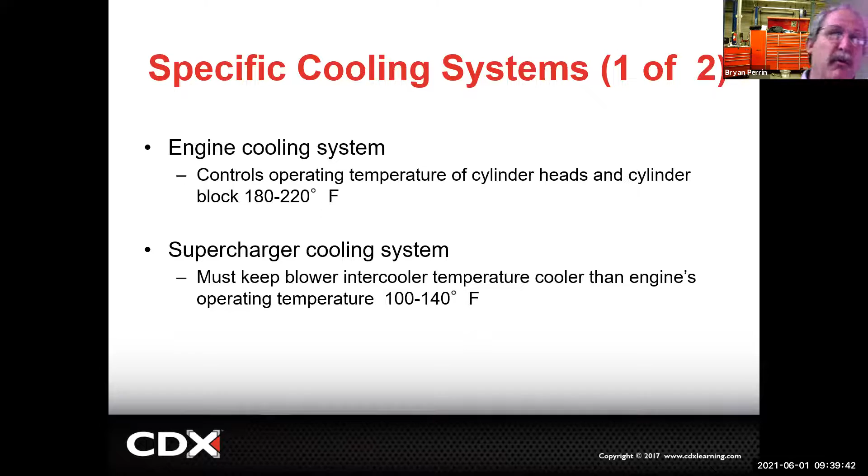And different cooling systems will operate at different temperatures. So here's an example. Engine cooling system for the ICE engine, for the internal combustion engine, normally operates between about 180 and 220. It's a good rule of thumb. We do have some systems that operate a little warmer than this. A supercharger cooling system on the same engine operates between 100 and 140. That's a very different temperature range. So what's normal for one component or one device or even one engine may be slightly different on another.

And I already talked briefly about my high voltage battery cooling system. Air or liquid removes battery cell heat when under prolonged high amperage draw. High voltage motor generator cooling system, a liquid coolant, prevents the motor generator overheating in full electric and hybrid gas-electric vehicles. High voltage engine control module cooling system forces air or liquid through or over aluminum heat sink surrounding the high power transistors for each leg of the three-phase circuits.

Occasionally I have people that are really into computers. If I have a serious gaming computer, it'll have a liquid cooled heat sink to keep the processor cool. So we do liquid cooling of processors on home computer units, commercial computer units. It would make sense that we would do that on some automotive computer units once we get to that certain temperature threshold.

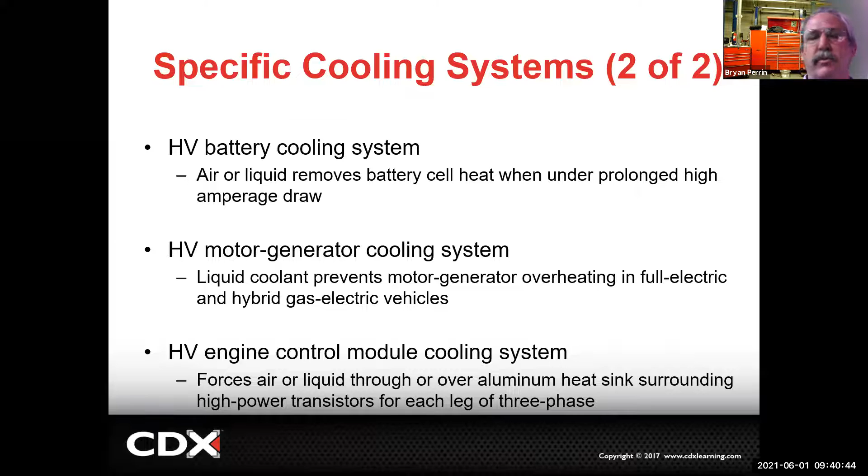On modern vehicles, there could be separate cooling systems for different components. Is that true or false? True. True, absolutely. True.

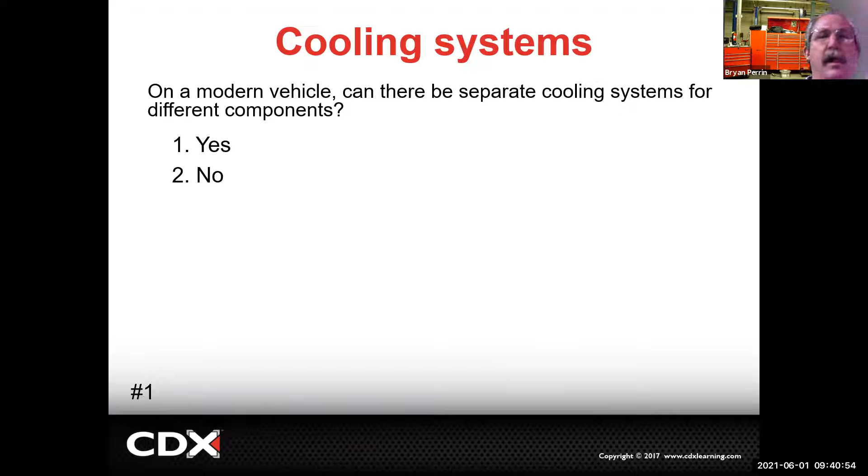Electrical cooling, one question I have. Like a transformer and winding, they have some special liquid oil for cooling in the transformer, but in the battery, what is the difference of the cooling system?

Well, it depends on the cooling system. There's several different styles, but what they're doing is they are either going to move air over the batteries or they're going to move liquid around the batteries to dissipate heat, or in the case of Tesla and some other manufacturers, heat the batteries up. So I can use a dedicated liquid system. Mercedes does this. And then that liquid system could be tied into an air conditioning system, or like on the Ford Escapes, they actually use the AC system to cool the high voltage battery. And if the AC system didn't work on the hybrid Escapes, then you get a warning light on for the high voltage system, and it would disable the high voltage system because they don't want to damage the batteries.

So AC is no longer an option, right? It's required because you're using it to control battery temperature. So manufacturers do it several different ways, but they're not running it through the battery. They're running it around the battery. So I think that might be where the confusion is. So we're putting the batteries and we're going to surround the battery with a liquid, or we're going to surround it with air that allows us to take the heat that's generated from that battery and dissipate it away from the battery.

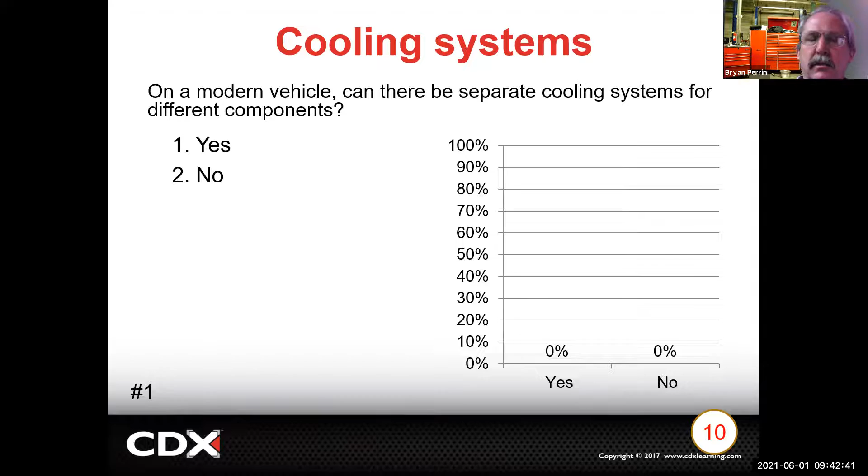Okay. So heat transfer moves areas of higher temperature to areas of lower temperature. So heat always moves from hot to cold. So you have cold air in your car because we took the heat out of the air, not because we made the air cold. So it's kind of a different way of thinking about it, kind of like our pressure vacuum discussion earlier.

But when it comes to thermodynamics, we're always moving heat because heat is energy. The more heat, the more energy. And I can't just get rid of energy, but I can move energy. I can make energy do other things. So for example, I could take electric power, which is energy, and convert it to rotational force. There's my starter, right? So the energy didn't suddenly go away when it went to the starter. It was converted to a mechanical function of rotation.

So because of how heat works, it goes from hot to cold. If I want to make something cold, I need to take out the heat. So if you go to your refrigerator or freezer when it's running and you feel the sides of it, they'll be warm because you're taking the heat out from inside the refrigerator and getting rid of it on the outside through the condenser coil. And that's how air conditioning works, on your house or your car - it's that thermal transfer.

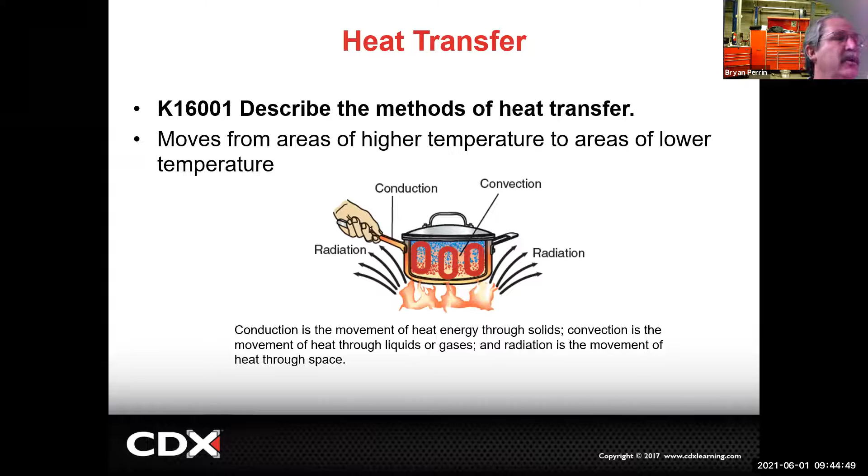So this is one of the criticisms, and I think it's a valid one, of our internal combustion engine: we generate a lot of energy because heat equals energy, and yet we're really not utilizing it effectively. There's a lot of possibilities, and people are playing with different things as far as getting the energy out of the exhaust or getting the energy out of the cooling system to get more efficiency out of this. So we have the combustion efficiency we talked about, which is about 90%. But even then, I'm only getting about 25 to 30% of the energy I produce to actually make the car go.

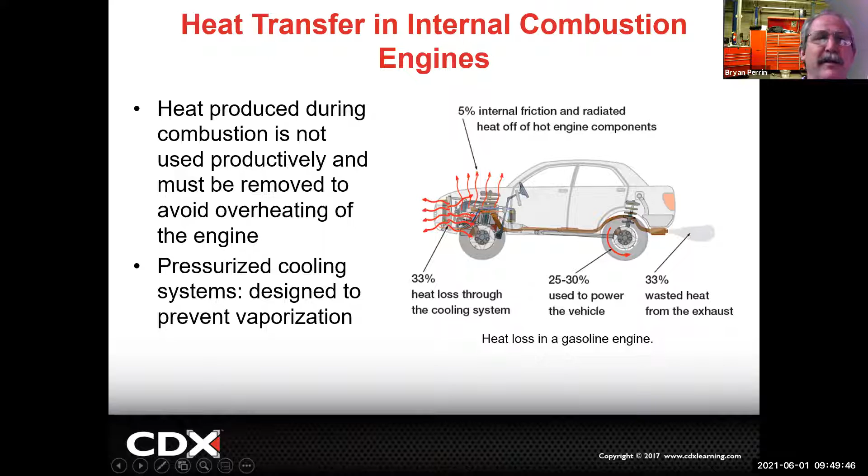Or, where's the stuff? Because certainly, especially on a hybrid vehicle, I could turn that heat energy into electricity from the exhaust, and there's technology out there to do that. If I'm getting a third of my energy from rotating the crankshaft, and I could pick up another third and generate electricity out of it efficiently - which means if I could generate electricity from exhaust heat, I could probably generate electricity from coolant heat too. So if I can convert heat to electricity, and there is technology out there that does that, not currently cost effective for automobiles, but the technology is there. What if I could get 96, 97% efficiency out of my internal combustion engine? Would that change our opinion on it? Because then theoretically, I'd use a third of the fuel I'm using now. Just food for thought. Like I said, I love technology.

So there are two types of engine cooling systems: air-cooled and water-cooled. Keep in mind, both of these use oil - oil is always going to help us cool the engine, but we don't define it as an oil-cooled or liquid-cooled engine. I put water-cooled here, but that's generic - I should probably just change that to liquid-cooled, because we don't run water in our cooling system, we run liquid. So it's a liquid-cooled system.

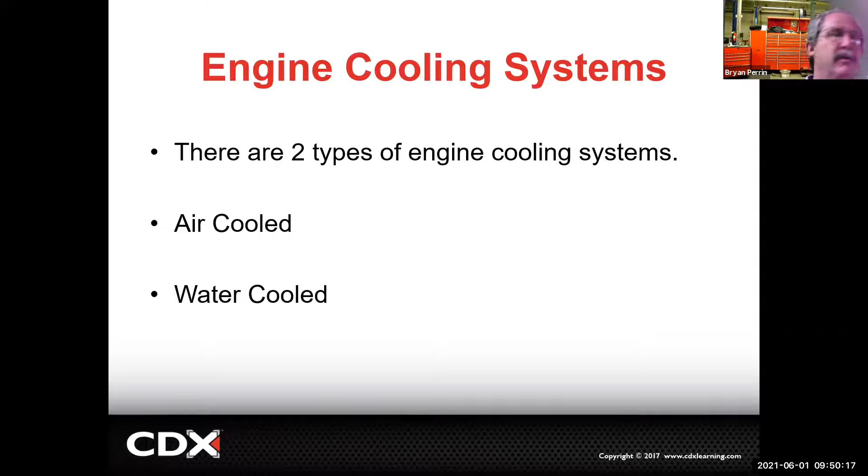The cooling system configurations - there's two primary configurations we use: standard flow and reverse flow, as we'll see for our liquid cooling system. My cooling system has to have a pump, and we're going to pump coolant from the engine. Here's my cylinders, so I have coolant surrounding my cylinders and water jackets. I'm going to pull coolant out as it gets hot on a standard flow into the radiator. As the radiator has air go through it, that heat energy is given to the air, and then the colder coolant is brought back into the engine around the water jackets. The hot stuff comes out the top and so on.

Also, our heater core is the device in the dash that allows us to have warm air inside the passenger compartment, and it also has a loop - it goes through the heater core and back. So we're constantly flowing coolant through the heater core. Some older systems had a heater control valve, a manual valve you could open and close to allow coolant through the heater or not. We saw those used really up until the 80s - through the 80s we used that, pretty well went away in the 90s, though I think some early 90s still used them.

A customer might complain that their air conditioning doesn't work well and think they need an AC service. In reality, it may be that the valve that closes off coolant flow to the heater isn't closed, so you're putting 220-degree air in there. No wonder the AC isn't getting cold.

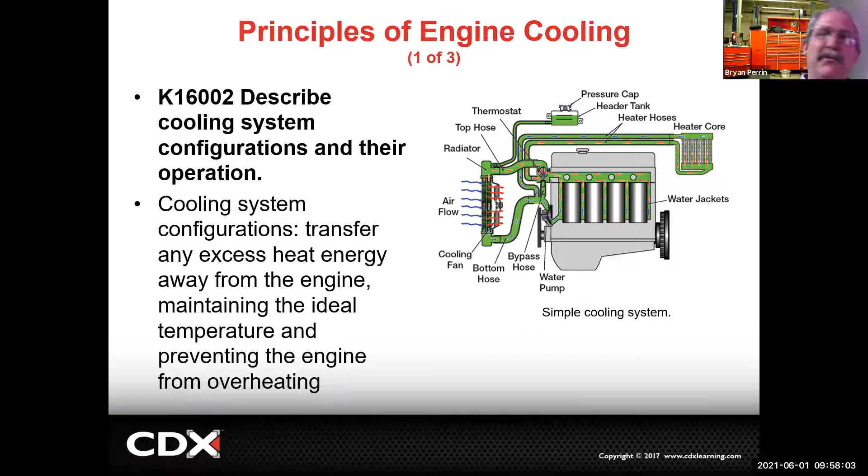So how's that for a little food for thought? On that note, actually one more thing.

They're very, very dirty on emissions, and they were used primarily by Volkswagen and Porsche. I need to go back really to the 60s to maybe early 70s, but certainly the 60s, to see some of the air-cooled Saabs, air-cooled Subarus, other air-cooled vehicles we had in this country.

But yet we sold air-cooled Volkswagen Bugs in Mexico City up until a couple of years ago. So they weren't healthy enough to have here. They're extremely dirty, cheap to manufacture, reasonably good on gasoline mileage. And so they sold them in other countries without those strict emission standards for the next 30, 40 years. Aren't we all breathing the same air kind of worldwide here somewhat?